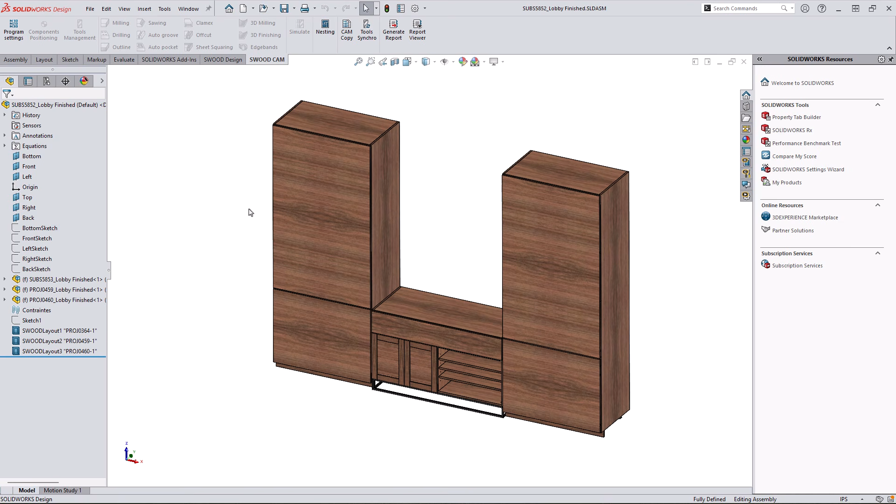Material costs remain one of the most volatile variables in cabinet manufacturing. While many shops focus on buying faster machines or adding labor to increase throughput, one of the largest opportunities for savings sits earlier in the process: how parts are nested before they ever reach the CNC.

SWOOD nesting is a practical tool that helps cabinet manufacturers consistently reduce sheet usage, improve machining efficiency, and gain better control over production. Let's see how we can stop burning cash by using smarter nesting processes in SWOOD.

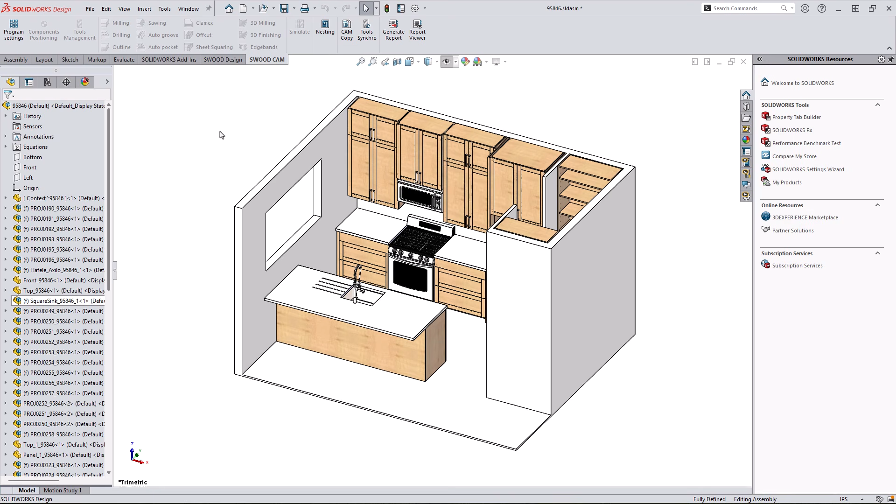In many cabinet shops, nesting is either handled by basic CAM software or done manually with limited automation. The result is often inefficient, and even small inefficiencies add up. Saving a few square feet per sheet doesn't sound dramatic until it's multiplied across hundreds or thousands of sheets per year. SWOOD nesting is built specifically for woodworking and panel-based manufacturing.

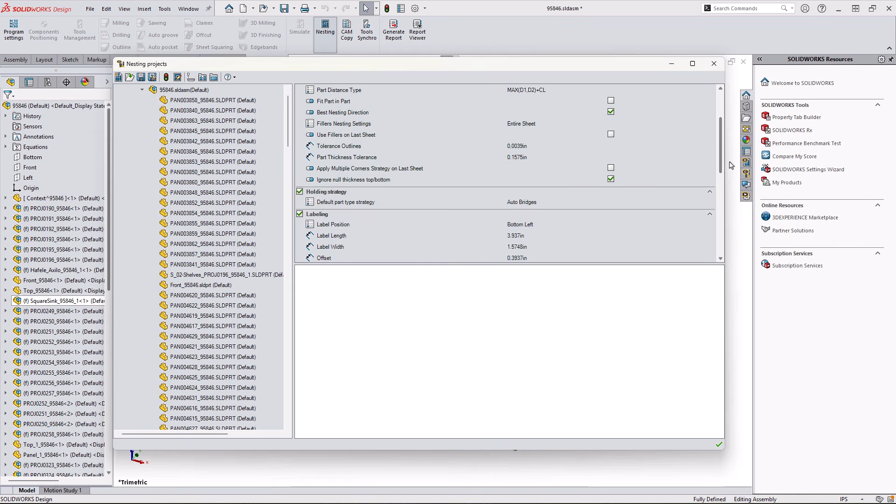Rather than forcing cabinet makers to adapt to generic nesting logic, it reflects how real shops work, automatically arranging parts to maximize sheet utilization while respecting critical constraints. It looks for opportunities to tuck smaller parts inside the voids of larger ones. This part-in-part logic is often where the cash fire prevention begins.

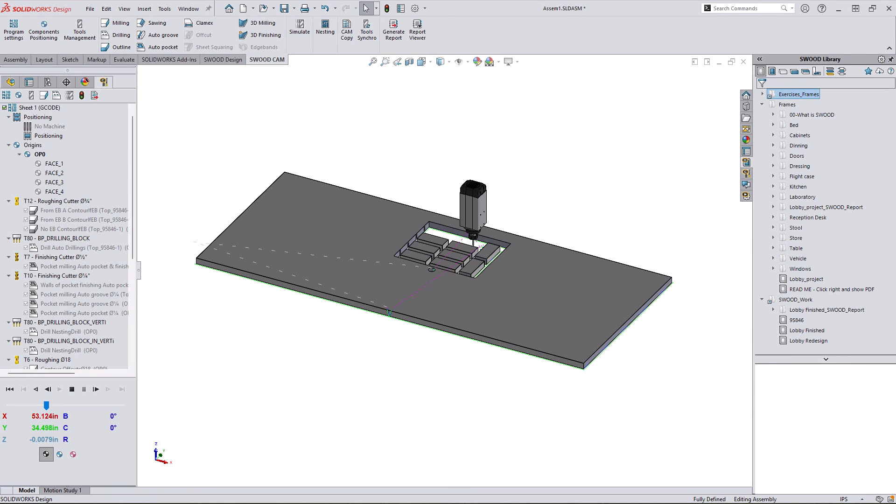Another time-saving capability is batch optimization. Instead of nesting one cabinet at a time, SWOOD nesting can process entire batches. This allows the software to find efficiencies across multiple jobs, often where the biggest material savings are found.

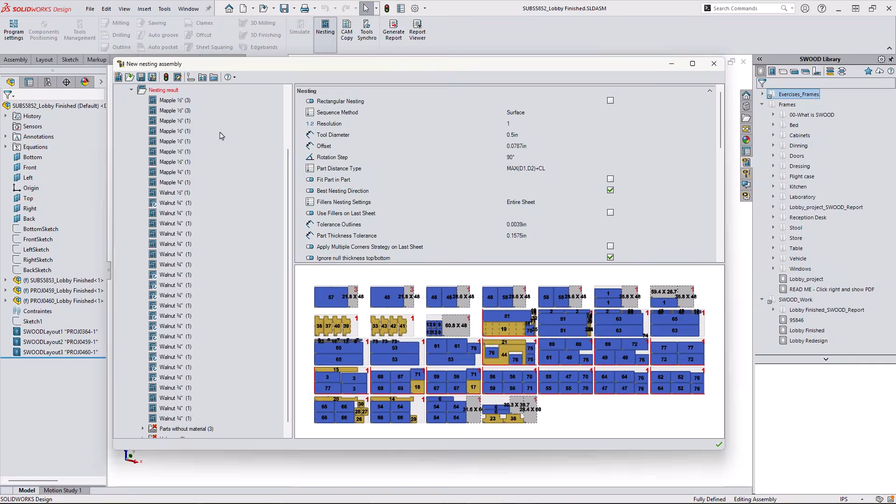SWOOD nesting also uses strategies that are tied directly to tool selection, cutting order, and machine behavior. Strategies like stay-down contours mean fewer air moves, cleaner cut paths, and reduced cycle times, all while preserving sheet integrity.

Another intelligent cash-saving option in SWOOD nesting allows remnants, or offcuts, to be tracked and reused automatically. Over time, this alone can significantly reduce the number of new sheets pulled from inventory.

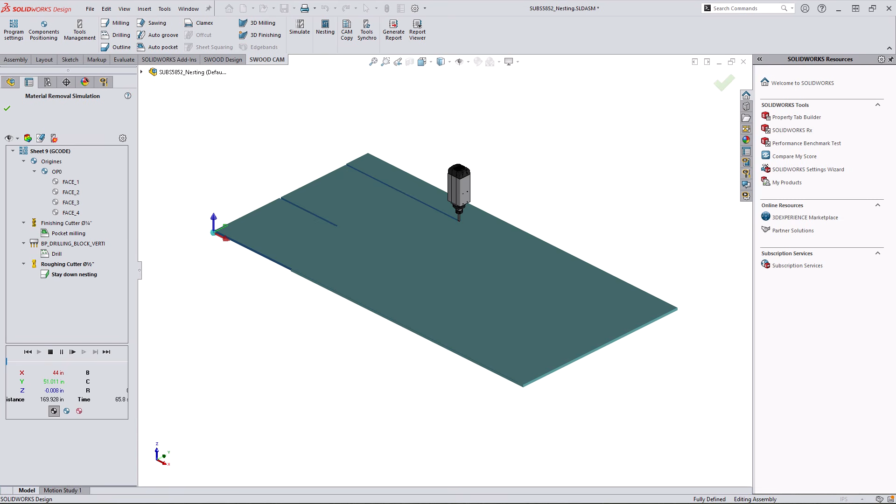When SWOOD nesting is implemented properly, many cabinet manufacturers see material savings approaching or exceeding 20%, especially when replacing manual or lightly automated nesting workflows.